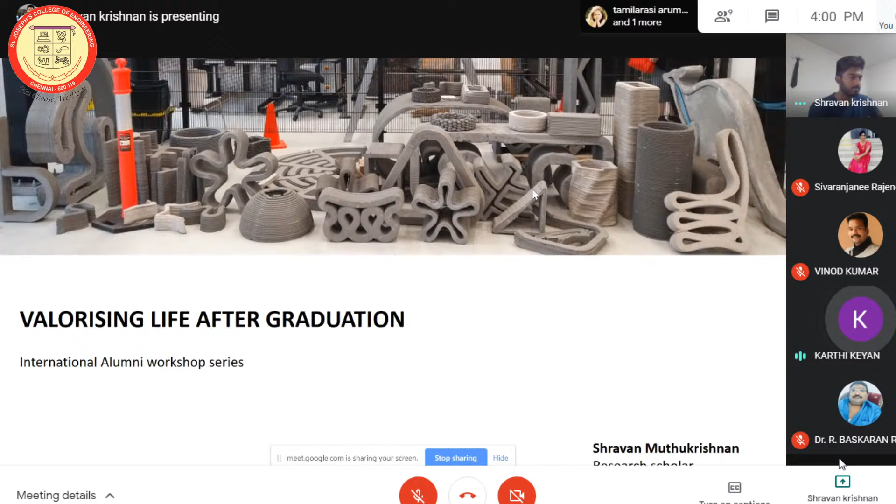To start with, life after college is the beginning of a new chapter. There are plenty of opportunities and experiences to be had which are unavailable in college. Many post-college students don't have their goals mapped out. You have an idea of what you would like to do in the near future, whether it's starting a career or continuing higher studies within the country or abroad. Making the transition from college student to young professional is harder for some, but if you are prepared for the kinds of responsibility you will face, it will get easier with time and experience.

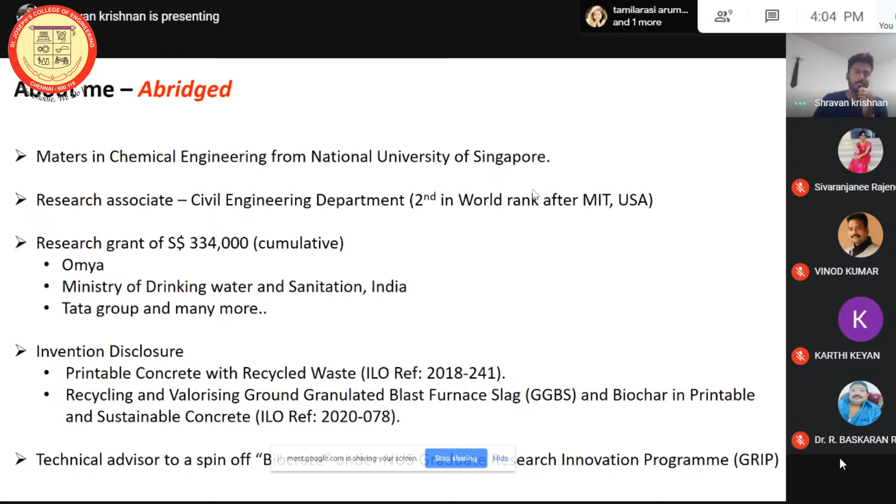I always believed you can't have two things together. You should always focus on one. Either you can be an entrepreneur or you can be a researcher. From 2016 to 2019, I was doing more management-based research, in which I wrote grant proposals and hired students to do research for me. At the end of 2019, to be precise September 2019, I chose to take the research lane and joined Prof. J. Sanjayan, a professor at Swinburne University and a great policymaker in the Concrete Institute as well as the government body of Australia that provides standards for building construction. And I joined him as a PhD scholar.

Right after joining, within 7 months, I published 3 papers. Titles are shown in the presentation, and one is accepted but yet to be published, and 4 are under review. I'm very proud to say that 8 out of 8 papers are first authored by me, and they are published in Q1 journals with impact factors of 2.3 to 7.2.

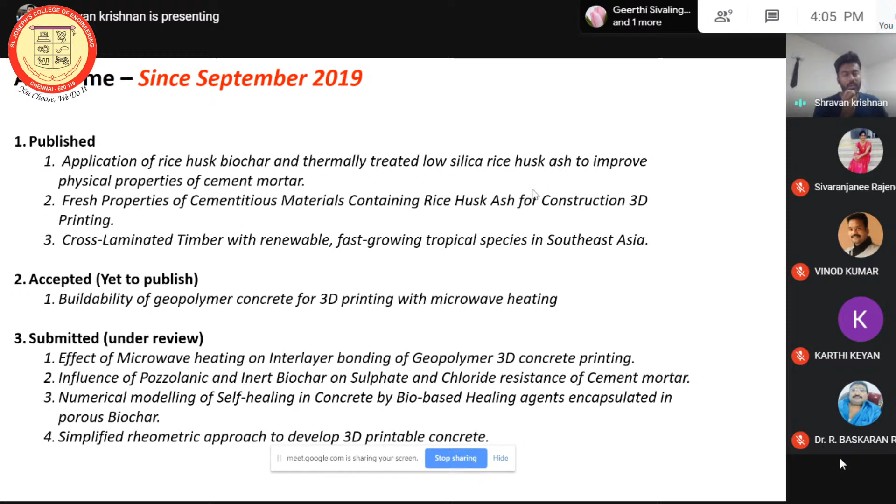Success is always the end of a movie, but there's a complete 2.5 hours of run before that, which I term as failure. You rise from the failure, and how you rise from the failure actually makes you different from others. So in my case, I had a lot of failures, but I'm pointing only 4 of them, and I want to show how I rose from those ashes and made myself a bit successful at the end.

So in class 12th, I had an aggregate of 70.8 percentage, and most of you might know that in every state of India, this mark is below average. And when I wrote the last examination of my higher 12th standard board, I knew that I was not going to get good marks to get into any universities. So I tried my best to get a good rank in the entrance examination. We have a board examination as well as entrance examinations for many universities.

In my days, it was called AIEEE and IIT JEE examinations, but now I guess it is called JEE Mains, and they have other examinations for respective universities. So I secured an AIR, which is All India Rank, of 3,327 for AIEEE, which is similar to JEE Mains nowadays. That examination was written by more than 3 lakh people, so a rank of 3,327 was supposed to be a good one.

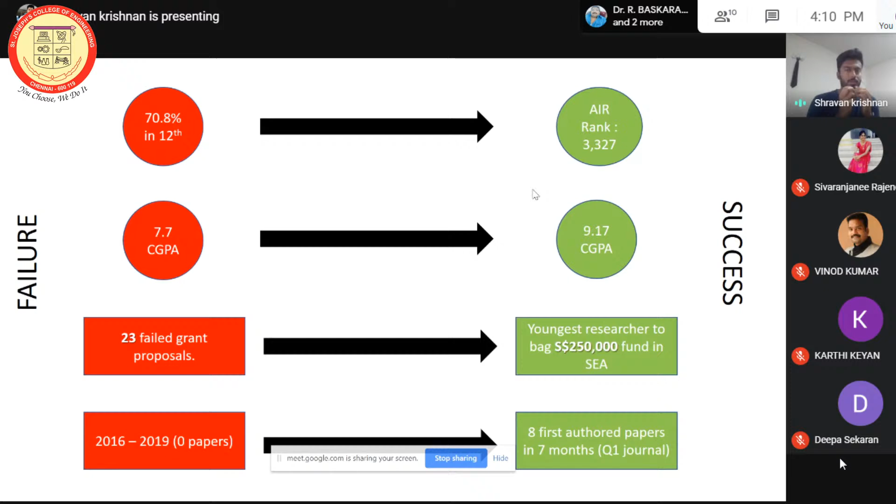So when I was in St. Joseph's, to be fair, I always had this three-step solution in which, for any problem I have, I always approach the faculty members, especially Venkatesh sir, Palniappan sir, Vinod sir, and Pratibha ma'am also sometimes. And I always seek their advice because these particular faculty members are

more capable than just giving you lectures on the subjects and giving you important questions in university examinations, and also arguing on whether the mess food was good or not. They are much more capable than that. They have also passed through the same era, bachelor's and all the phases in life which you are also going through. So they know much better, and your success mantra will always be good if you try to build with the advice they have given.

So I did that during my 4 years of bachelor's, and I always made sure that I also have something different from other students in the similar field. As I said, I went to the library and did some research. I'm not sure if St. Joseph's has this now or not, but you can go to the library and download papers from the journal for free. Usually every e-copy of a journal paper will be around $35 to $40, but you can download it for free from St. Joseph Library. So better you do that.

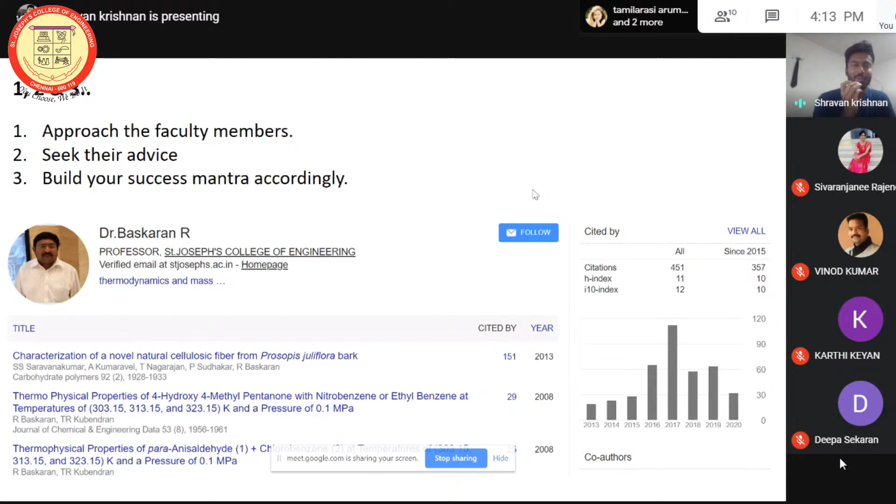And for your research interest, to see which professor shares your research interest, you can just go to Google Scholar, type any professor's name and see what papers they have published. For example, in my slide I have shown Baskaran sir's Google Scholar profile, in which you can see that more than 450 people are citing his articles, and you can see what areas he's working in. If those areas are your interest, then you can make an appointment and talk to him. I'm sure they'll be more than happy to give you advice on that than telling how to make mess food better in future.

Then plus the communication: you definitely have some profiles in Facebook and Twitter, but also have a good, active profile in academic social media like LinkedIn, ResearchGate, and academia.edu, where you can give your ideas. You don't have to publish a paper or have some proof for that. You can just post your ideas on these three social medias. Sometimes I have seen people who got recruited to professors' research teams by just publishing the idea, what they think can happen, just speculations, hypotheses. Just publish those. You never know, a dream professor or faculty member would come, accept your idea and want to work with you in future. So please do that.

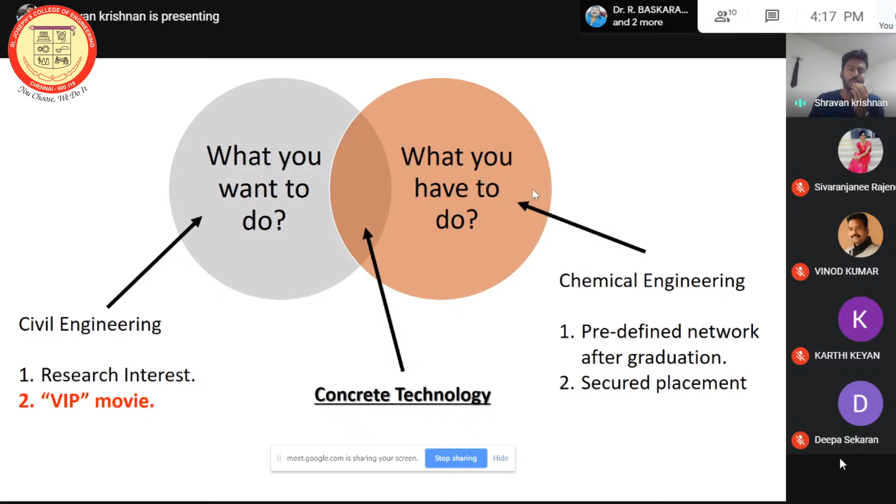And if you have a good linkage between what you want to do and what you have to do, if you are clear on that, that linkage will be your success mantra. For me, it was concrete technology. Concrete technology links civil engineering as well as chemical engineering, which is how I'm pursuing my PhD right now in concrete technology. So this brings me to my topic, construction 3D printing.

I would like to give you some context on why I chose this topic. Certain national reports say that more than 150 million people, which is about 2% of the world population, are homeless, and 1.6 billion people, which is more than 20% of the world population, lack adequate housing. In places like Mali, and also some rural areas of India, more than 80% of the population

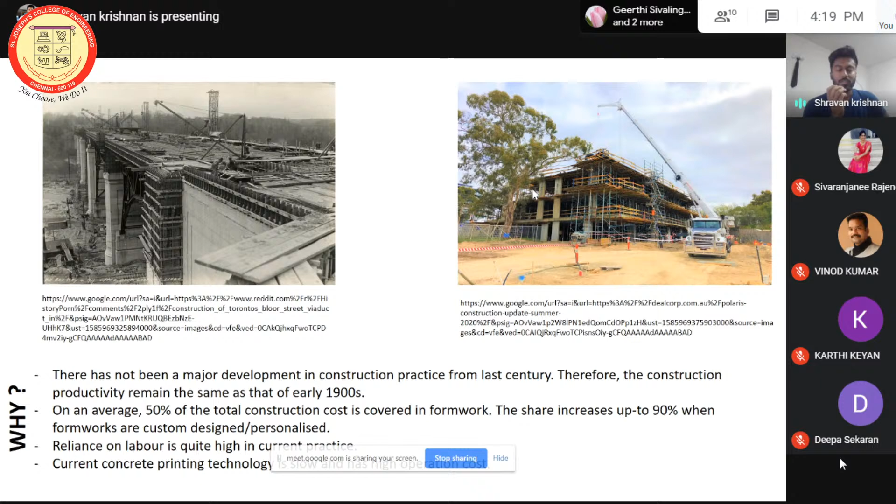To give an analogy, like I said previously, I compare a construction process with baking a cake, in which your mold, which holds the batter and gives the shape, is 700 rupees, whereas the batter, which is the thing you actually eat, is just 100 rupees. And when your formwork is reusable, you get a cake for around 150 or 200 rupees in the market.

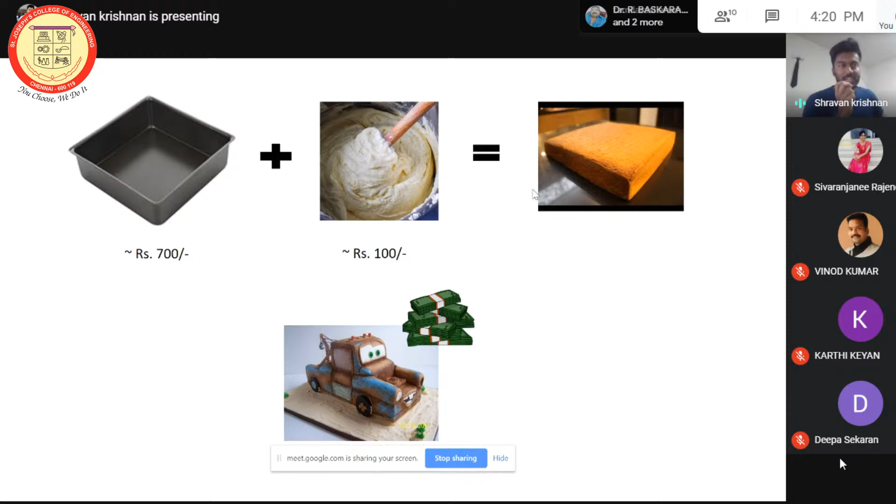What if I want a customized design for my cake, like the picture downstairs? I guess it's from the movie Cars. If I want something like that, I need to use a mold which is customized to me. That is why that particular cake costs much more than what you usually get in the market, which is rectangular or circular.

So what we need is a construction process with high productivity that is formwork free. The material should be highly sustainable, because for every 1 ton of cement produced, you emit 1 ton of equivalent carbon dioxide, which is a greenhouse gas, and we all know the negative impacts of greenhouse gases on society. And you should have a method of construction whose cost is independent of design. That is, even if I go for a curve or any complex shape, my price should remain constant no matter what shape I construct.

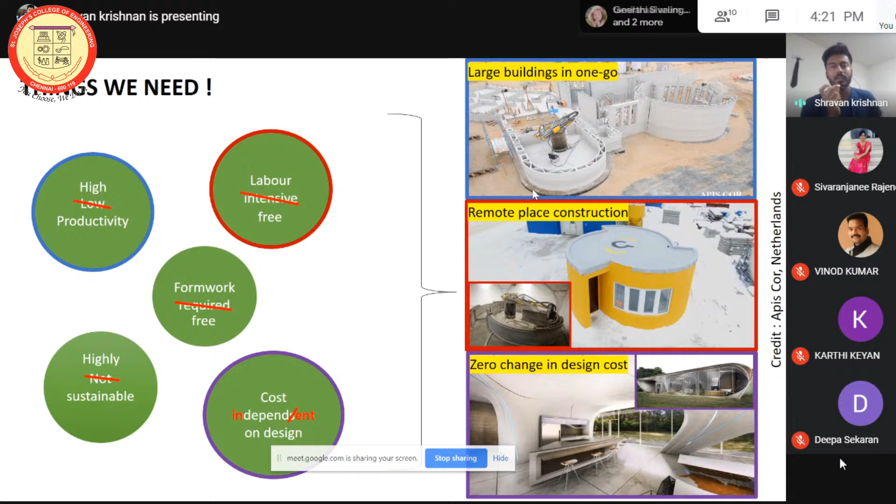And I would say labor free also, because if you want to go to certain remote areas where humans can't go and stay, the construction cost is majorly impacted by the transportation of labor to that particular point. So to reduce the overall construction cost, you need a method which is labor free also. So this is where construction 3D printing comes in.

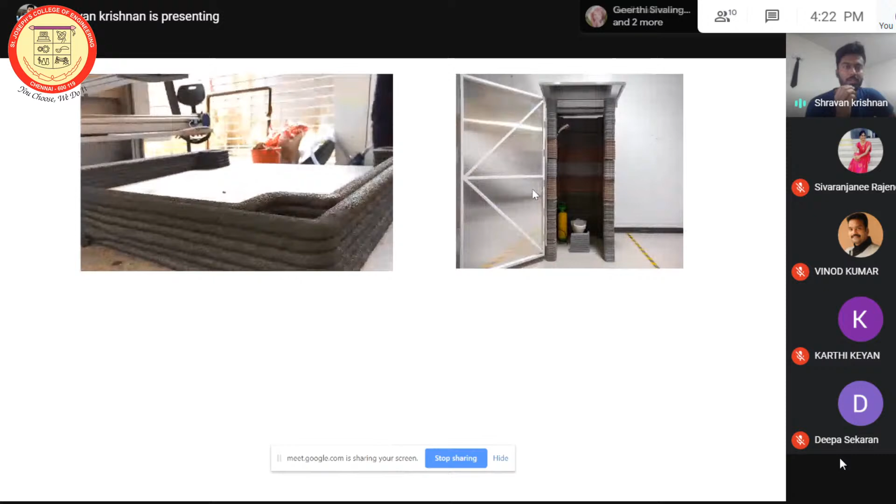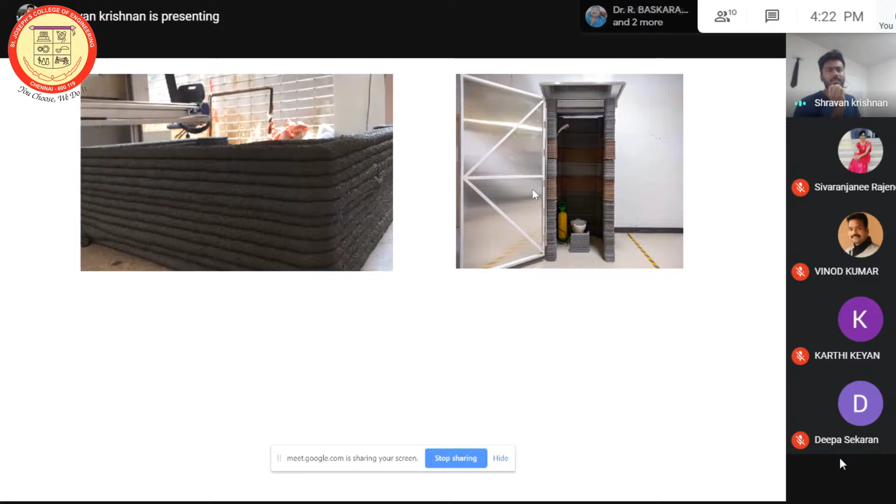So as a proof of concept, I was given a project from the Ministry of Drinking Water and Sanitation to replace or to build toilets in districts or villages in Tiruppur, in Tamil Nadu, and Darbhanga in Bihar. So I used the construction 3D printing technique to replace all those not so good toilets with somewhat durable toilets with the money they gave. I guess it was $190 equivalent, which is 12,000 or 13,000 Indian rupees. And I had to build a toilet on that particular budget.

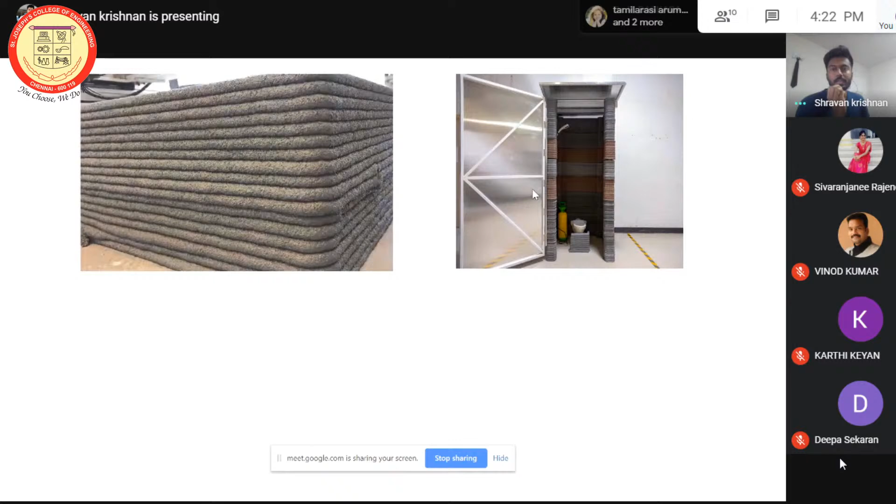And if you see the red colored section of the toilet, those are the recycled bricks, which I picked up from the village itself. And the gray colored ones are geopolymers. They are not cement. They're cement free. They have waste products from a coal-fired power plant, which is Neyveli, I guess, in Tamil Nadu. I got fly ash from the coal-fired power plant, and also rice husk ash.

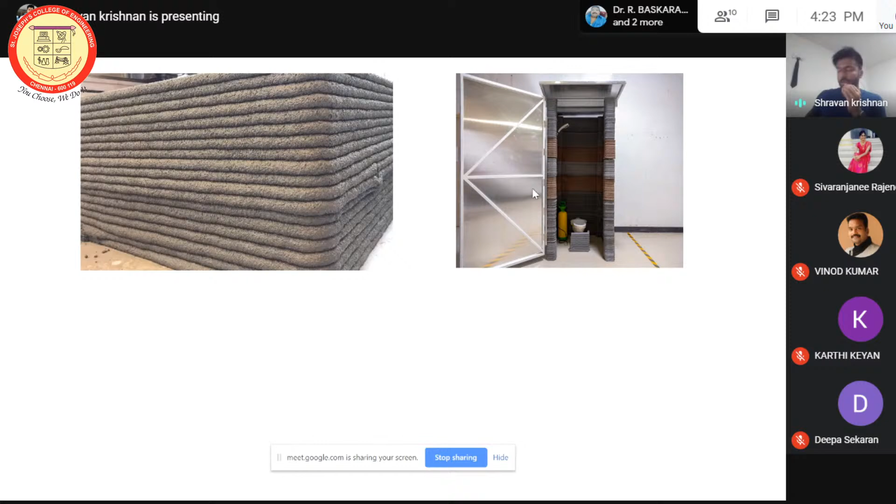So in both the villages, the primary occupation was farming, paddy farming, and they threw rice husk, which is a byproduct of rice milling, into the water and contaminated the water resources. So I tried to extract those waste particles and turned them into something which is useful for their own village by constructing toilets.

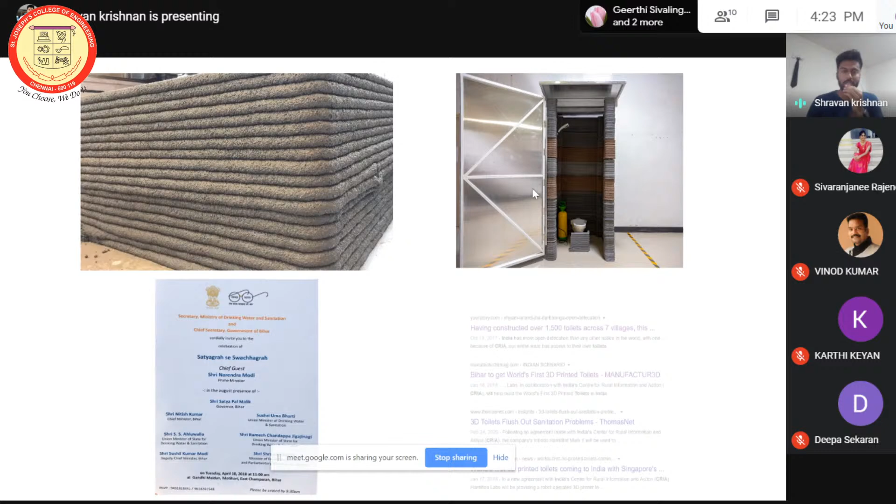So this particular project of mine piqued interest, and the same Ministry of Drinking Water and Sanitation gave me an invitation to discuss this with the Prime Minister's Office and how we could implement it on a larger scale in every part of India where it is required. And you can actually Google 3D printed toilet, and you can find the areas where we went and implemented this idea.

Yes, so I'm just moving a little bit technical now. So I also want to prove how a chemical engineer is required in a civil engineering field. So this construction 3D printing can be categorized into three major sections: mixing, pumping, and extrusion. In pumping, usually we need the material to be really low viscous, such that there is no blockage in the pumping line or the pipe, and the pumping lines are really long. So you need to make sure that the viscosity remains low until it is extruded.

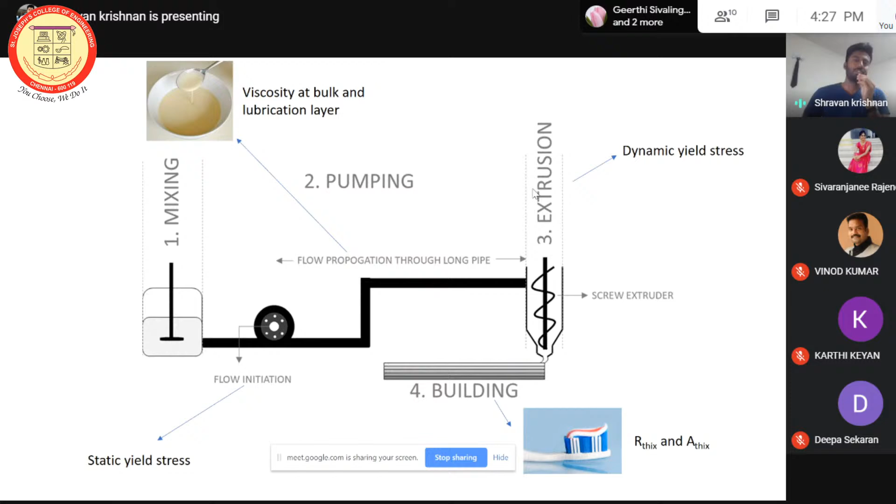So again, nowadays, any research is not a single department based research. It's a multicultural, interdepartmental research, and you need to know your area and how you can help the other department guys with your knowledge. Always be a big fish in a small pond, and you will get a lot of attention very easily, instead of just becoming a processing engineer or reactor engineer, which almost everyone is doing after chemical engineering. That's like a small fish in a big pond. So I would say, rather be a big fish in a small pond than a small fish in a big pond.

Now I would like to show a video which will actually give you an idea of what construction 3D printing is. And here it goes. Just 1 second.

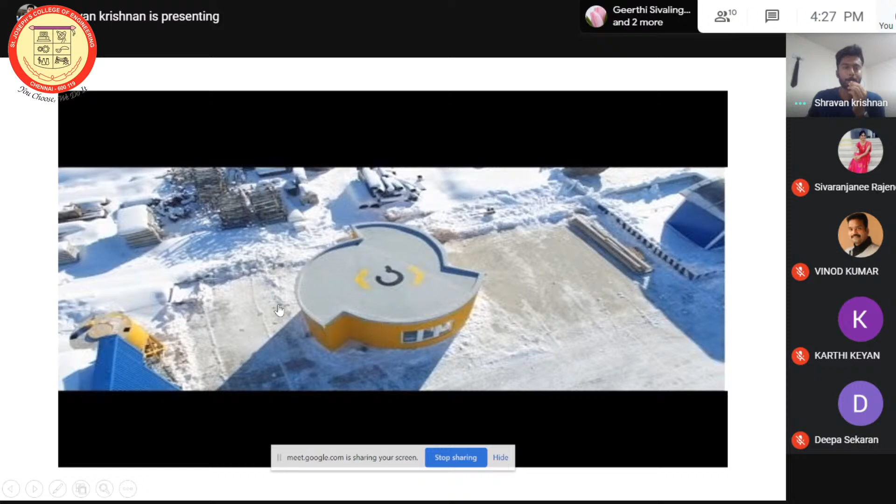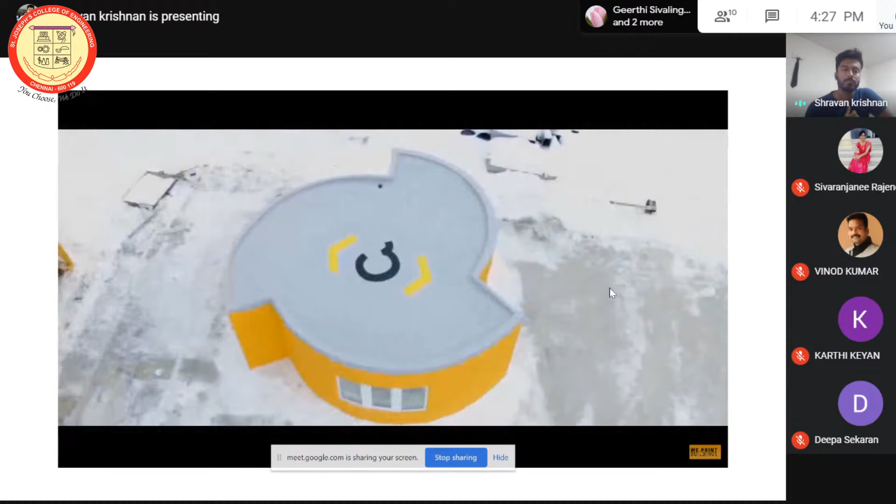This house was built in 24 hours. How? Thanks to modern technology, Apis Cor 3D printing.

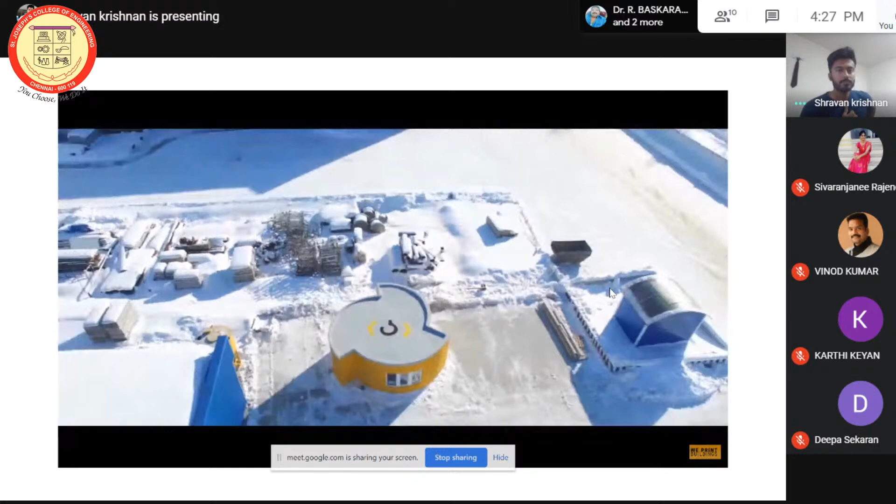Apis Cor, building the future today.

3D printing? I think I've heard about it. Well, but it was just so expensive. I don't think it's possible right now. But I've heard, yes, I've heard that you can make some stuff, some little stuff. The house in 24 hours.

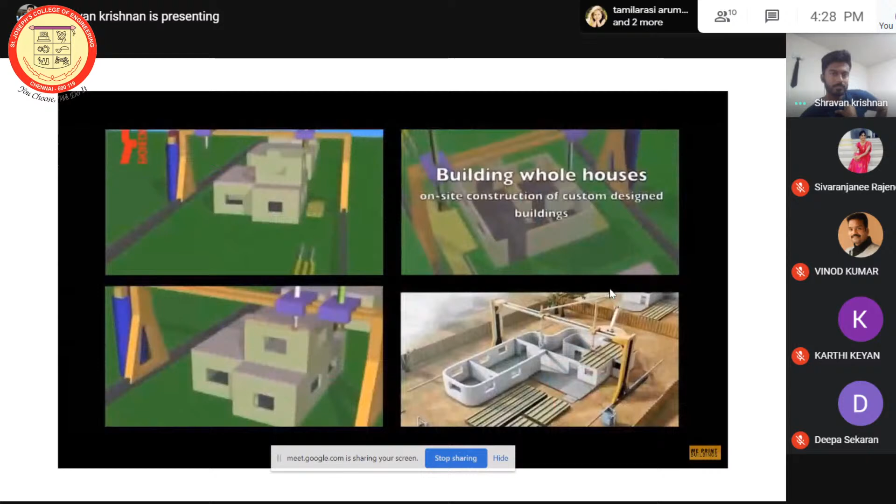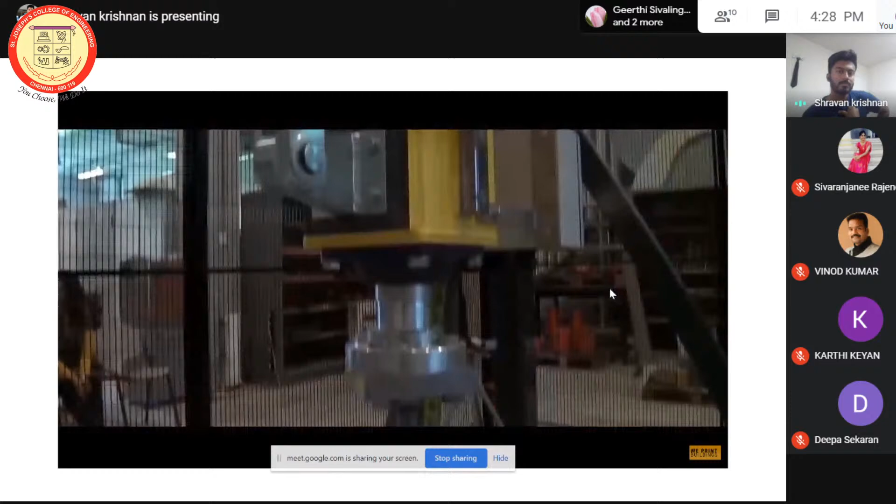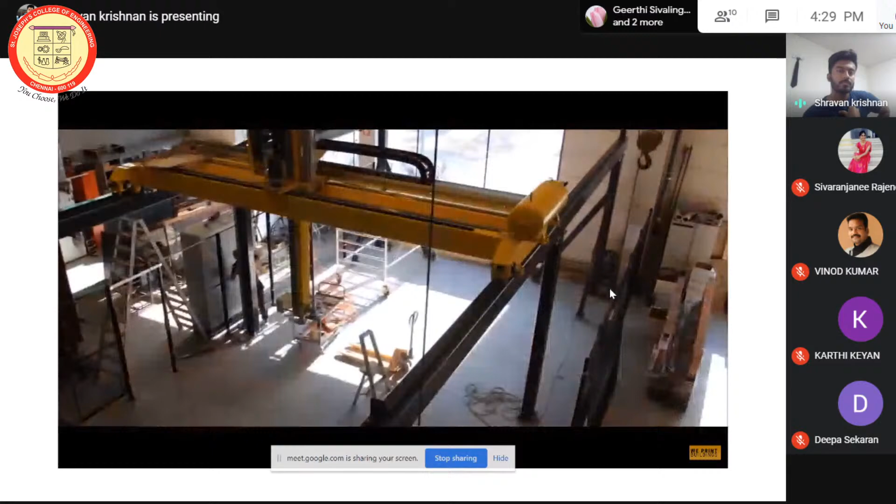Sounds interesting. Construction 3D printing and its advantages have been known for a long time, but it didn't leave the facilities of closed factories. Existing printers are big and bulky, have a portal design, have height restrictions for printed buildings, as well as are difficult to transport and assemble on site. This is an expensive novelty which could never find a wide application in the construction industry. These printers print only separate walls and sections of buildings, and subsequent assembling is inevitable.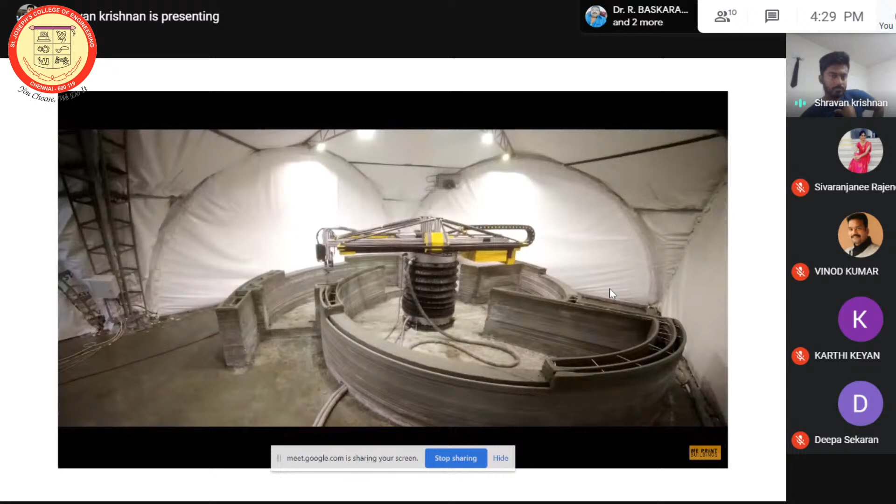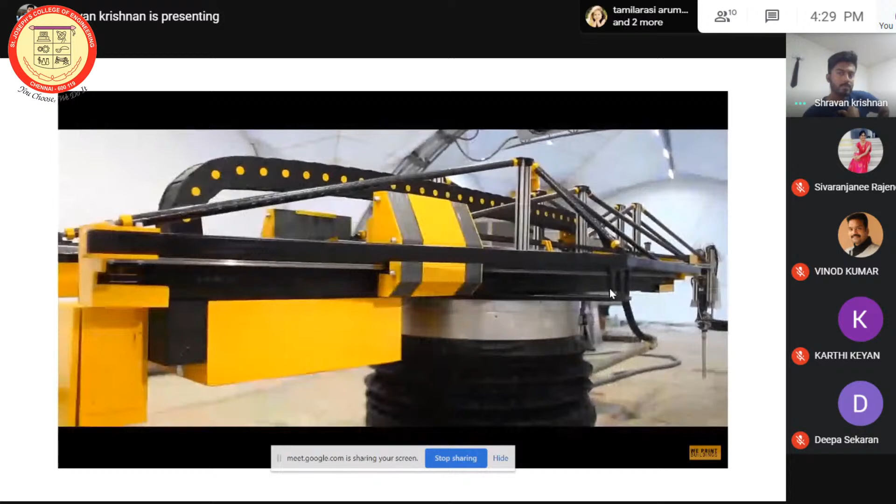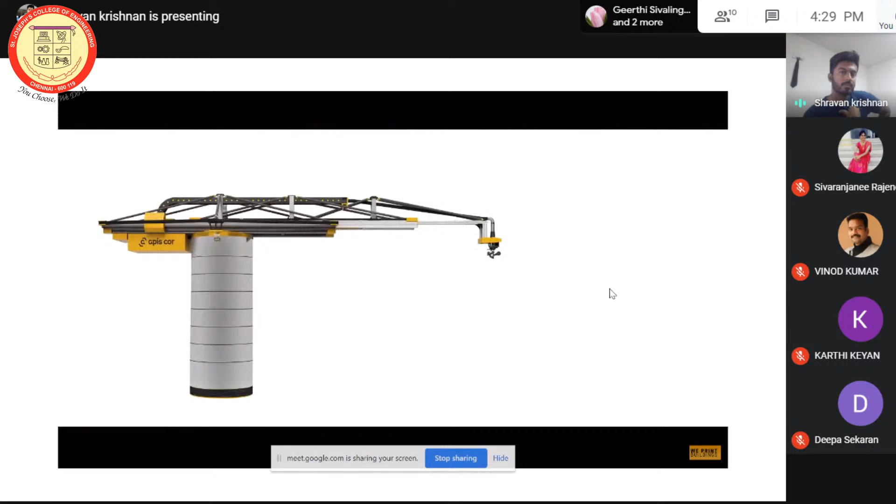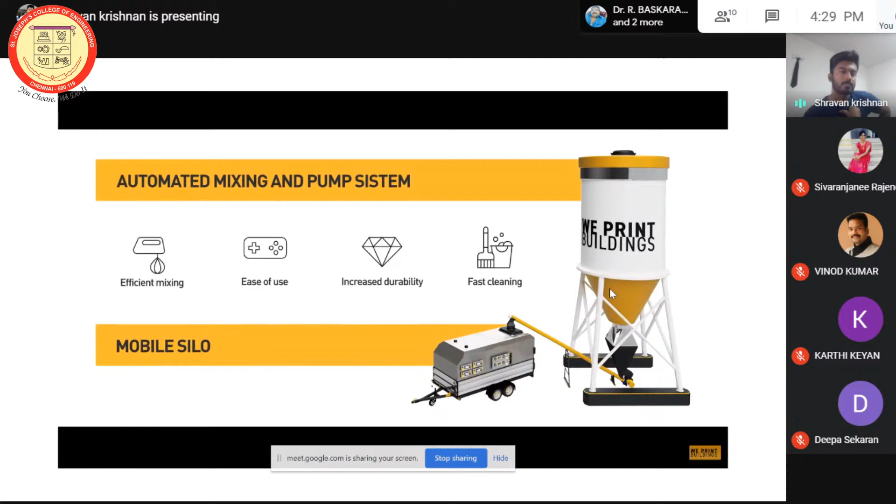The walls of this house were printed entirely on site. This is the world's first actually printed house. With the advent of Apis Cor technology, construction 3D printing opens a new round of evolution thanks to the innovative design of the printer. Apis Cor technology consists of a mobile construction 3D printer and automatic mix and supply unit, which combine to make the construction printing process as much automated as possible and almost eliminate the human factor. This equipment is unique and has no analogs in the world today.

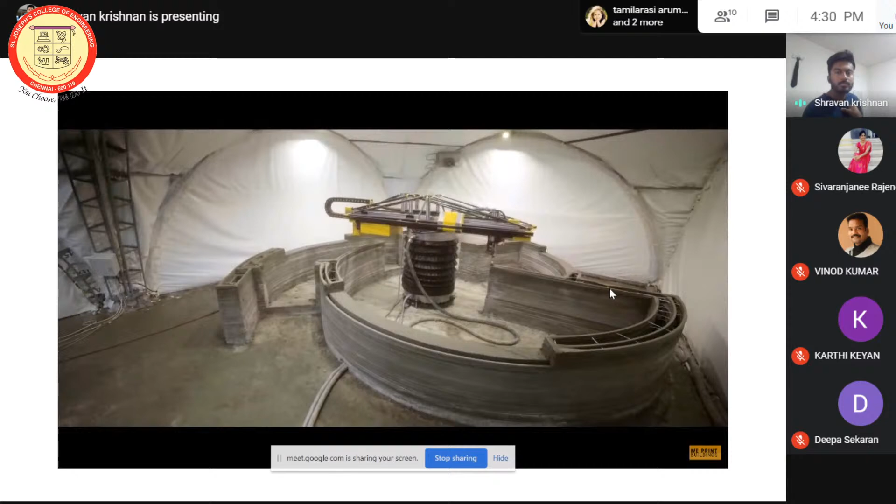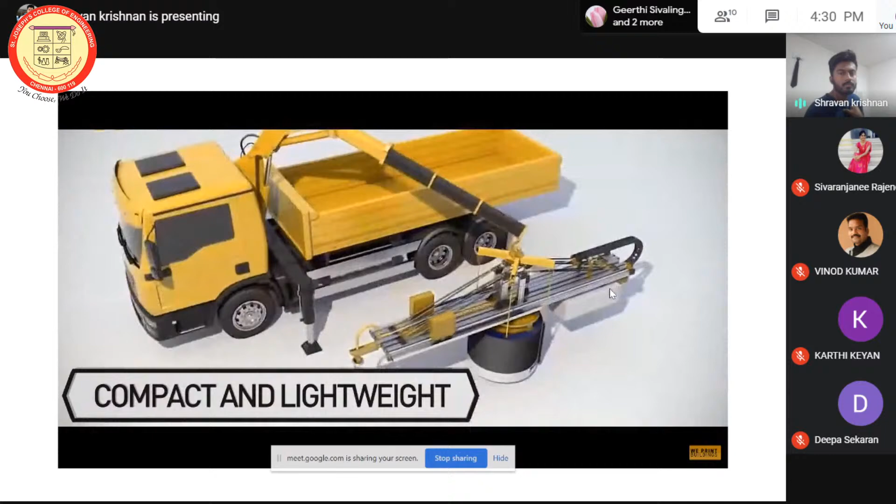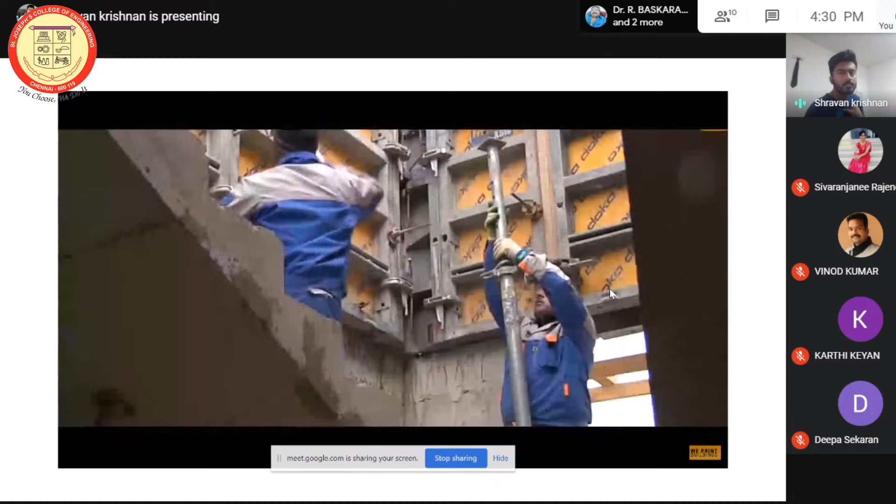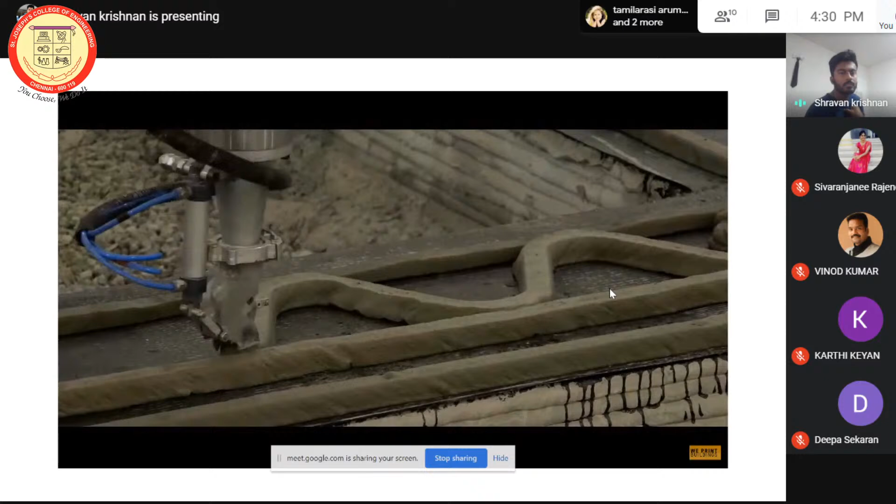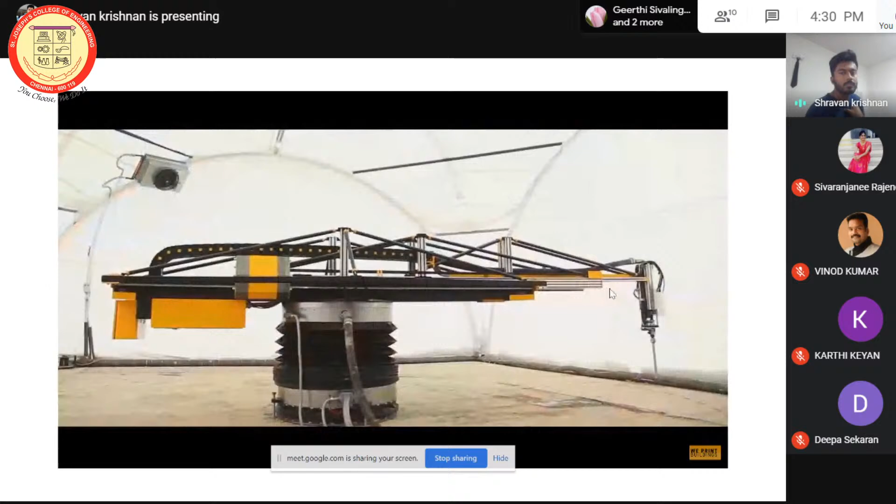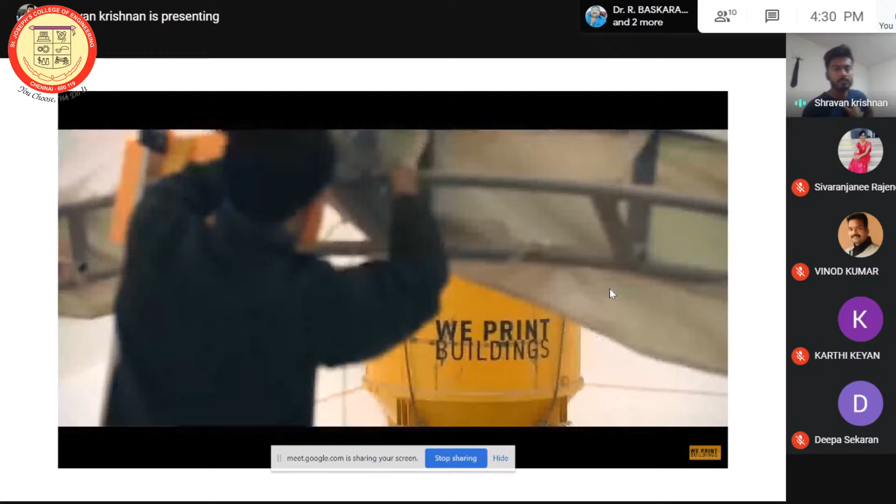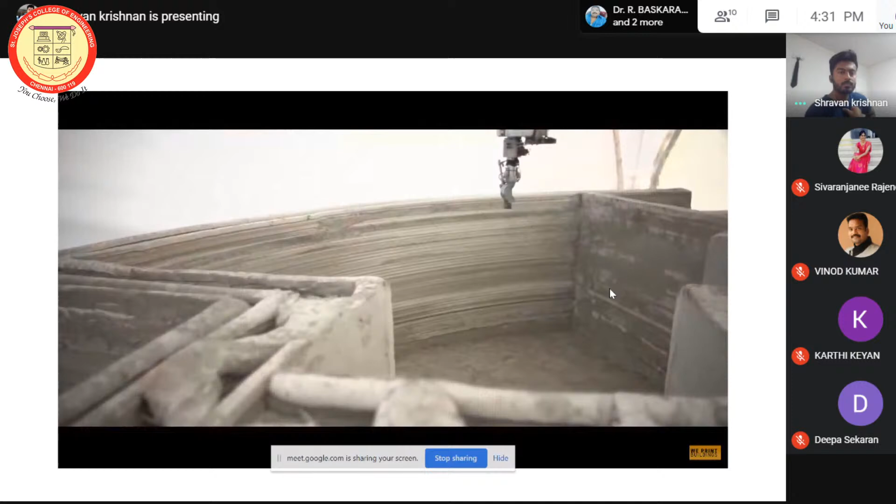Our project has been implemented at the coldest time of the year. Application of the concrete mixture that is used as the ink is possible at temperatures from 5 degrees Celsius above zero. The equipment can operate at temperatures as low as minus 35 degrees Celsius. However, the problem was easily solved by installing the protective tent, which supported the required temperature. Time of printing amounted to 24 hours. Soon, using new materials such as geopolymer concrete, houses could be printed in both summer and winter.

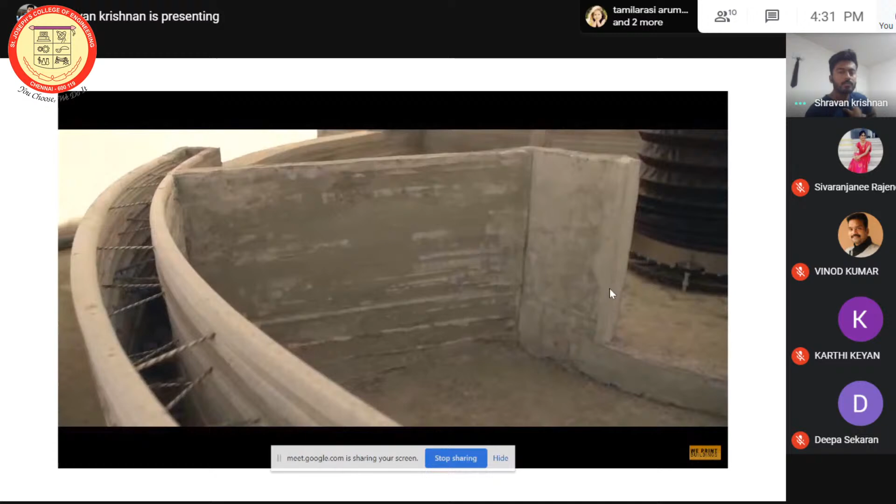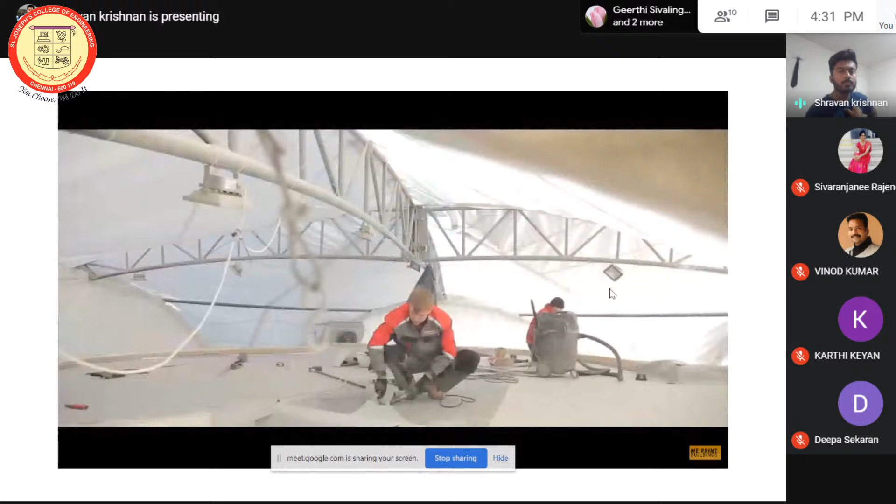In the printing process, we used horizontal fiberglass reinforcements for the walls. The quality of the printed wall surface allows to perform final finishing immediately, which significantly reduces the cost of finishing works. The roof of the printed house, in accordance with the architectural project, is flat. Such a roof can effectively withstand high snow loads and durability requirements. Its cost is comparable with steep roofs, which are common for our country.

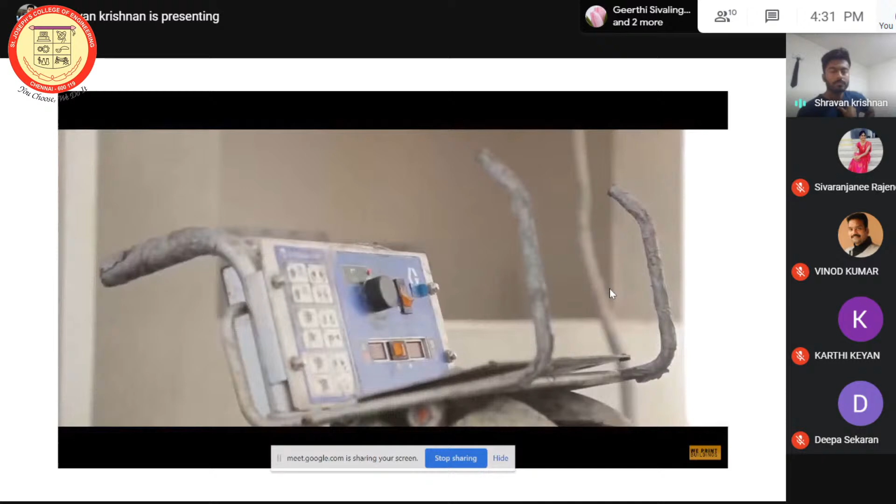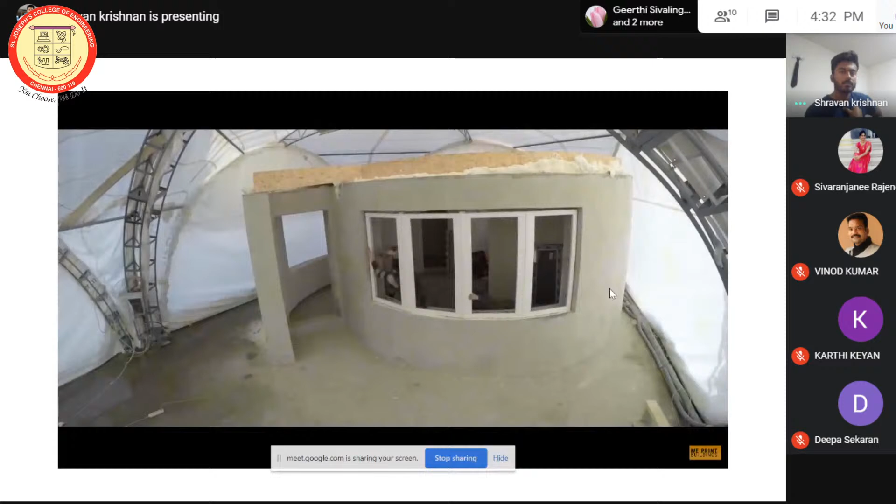Apis Cor construction 3D printing technology adapted for different methods of printed walls thermal insulation. This project used loose dry insulating material on one part of the house and polyurethane filler composition on the other. Technology does not require fixtures and fills all voids in the space between the bearing wall and the outer concrete structure, avoids the formation of cold bridges. On the inside, the printed house is no different from a regular concrete house. It is also comfortable and reliable.

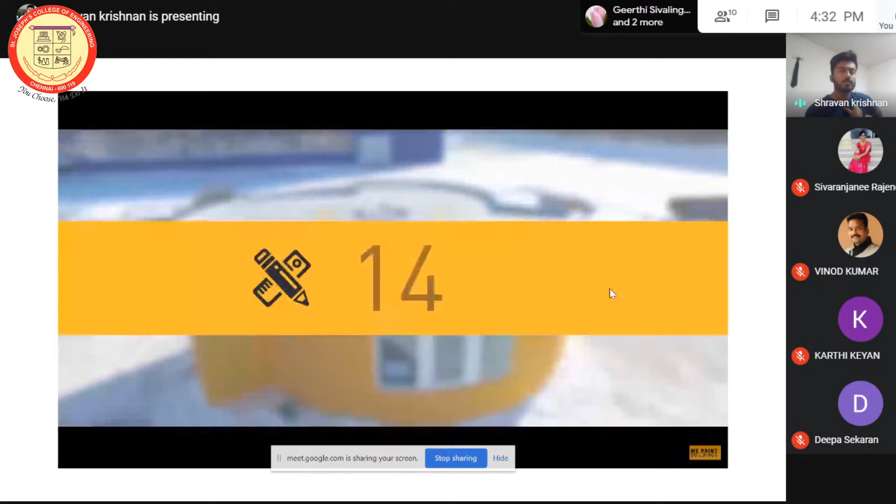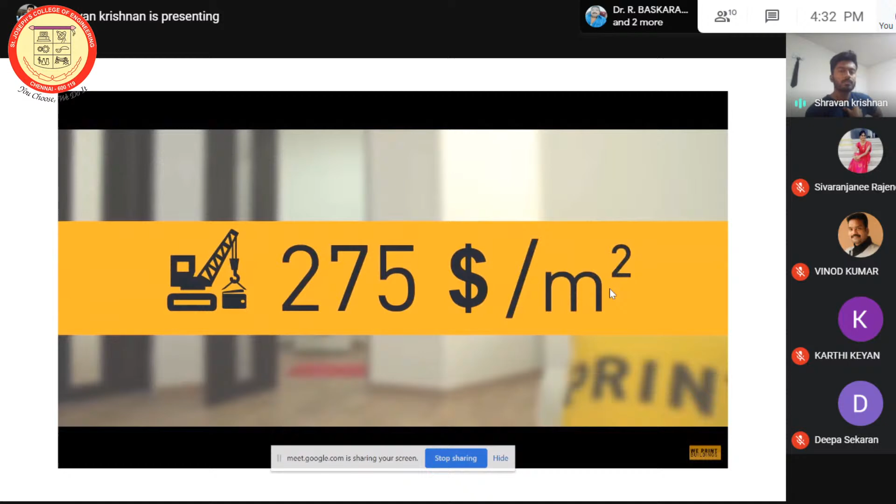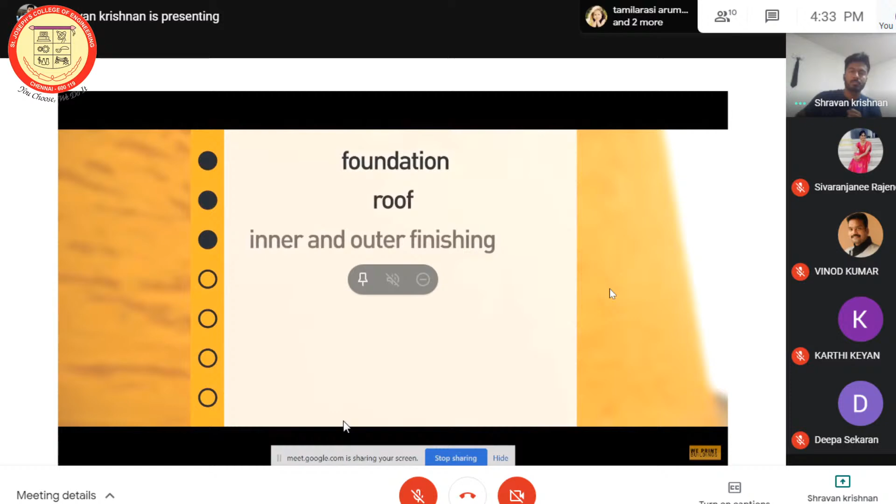The house interior includes a hall, a bathroom, a living room, and a compact functional kitchen with the most modern appliances. The house size is 38 square meters. Construction costs amounted to $10,134, which corresponds to approximately $275 per square meter. And this, in view of the shape complexity of the building. Prices include all works and materials for the construction of foundation, roof, exterior and interior finishing works, installation of heat insulation of walls, windows, floors, and ceilings.

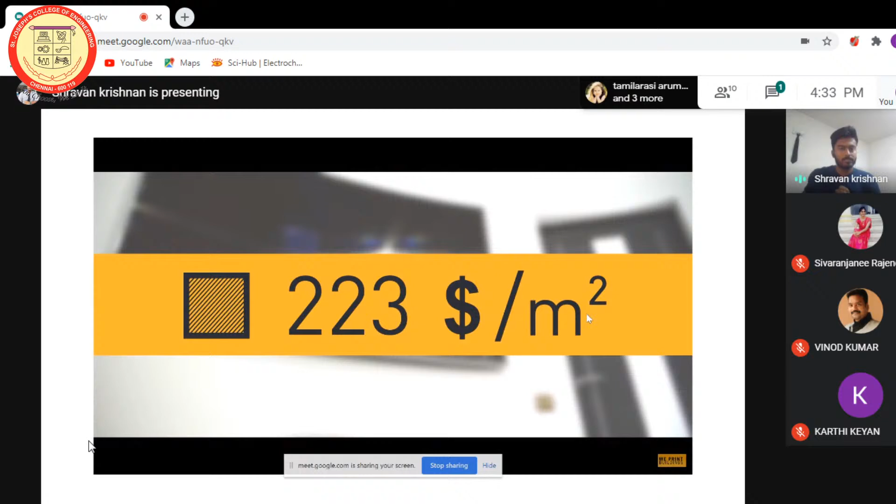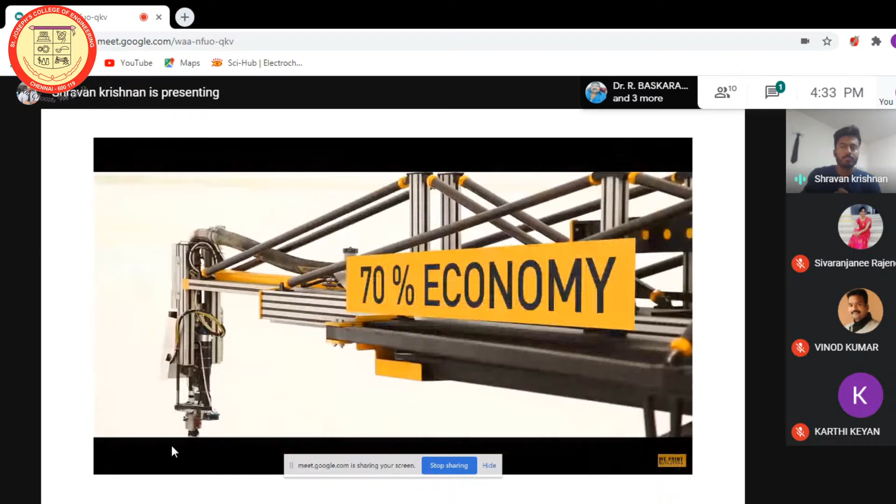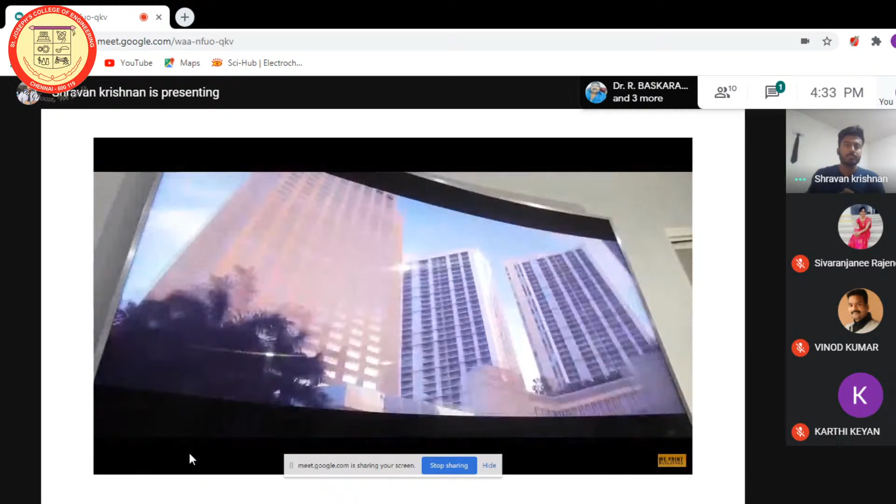A regular square house made using materials of an average price category would cost about $223 per square meter. The use of Apis Cor construction 3D printer allows to save up to 70% on erecting building boxes compared to traditional material and labor-intensive construction methods. The Apis Cor company and its partners are confident that this house was the first step which convinced the world that 3D technology on the market today is a reality. 3D printers enter the global market and construction sites worldwide.

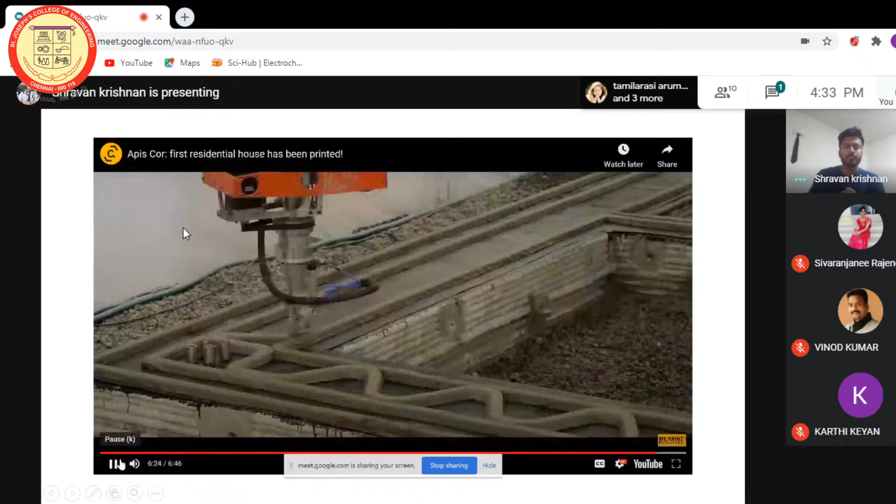It's just $10,000 for the whole building, which is equivalent to what, 5 lakhs or 6 lakhs Indian rupees for the whole building. You can't get that particular house for that cheap, even in the outskirts of a city. So this is how economic this particular construction method is. Just because there is no formwork. That formwork was removed, and we were able to save millions of dollars.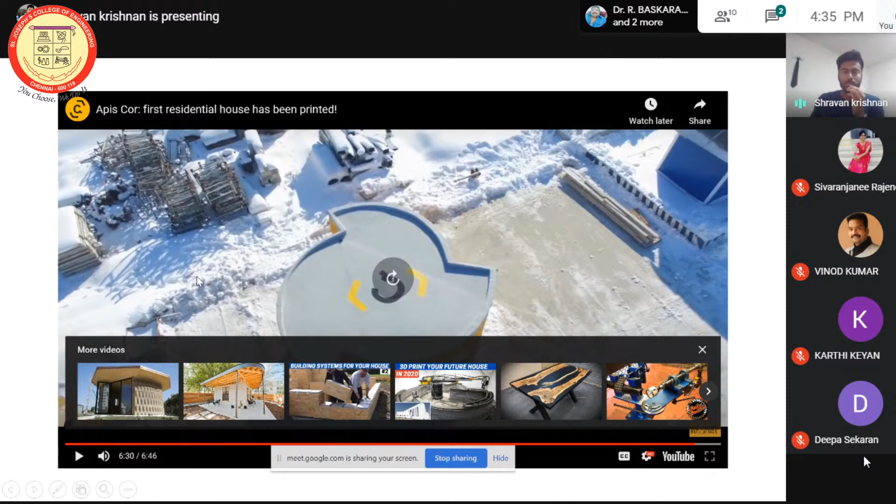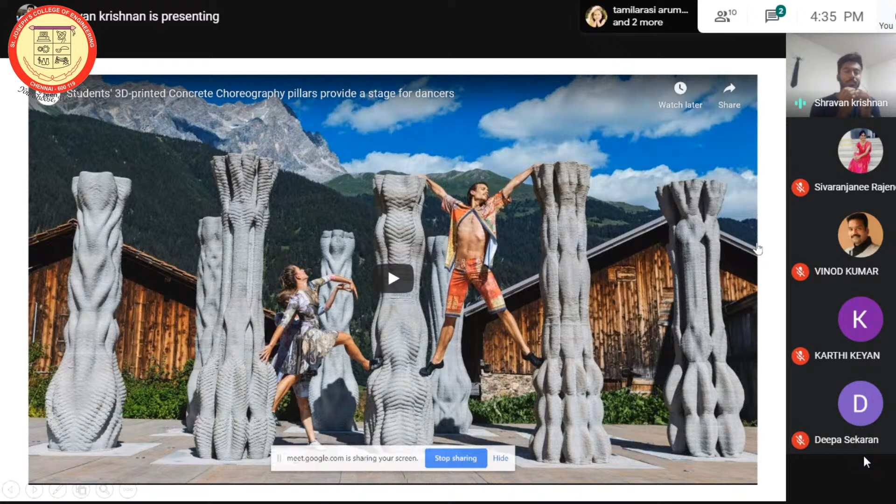In the next video, which is just for 1 minute, I would like to show how complex shapes you can build using 3D printing, which is kind of not possible with traditional construction techniques. These particular areas are where I feel construction 3D printing will actually have a better role than other prefabrication or traditional construction. So just bear with me for another 1 minute. This video will show how you can build those complicated shapes.